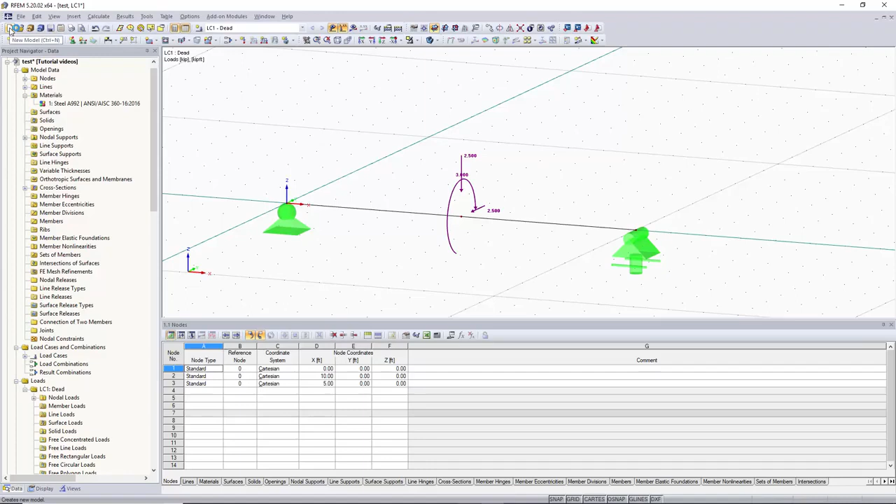To start off, we will create a new model by going up to the new model button. We can call this model video 6. Everything in here looks okay, so we'll click OK.

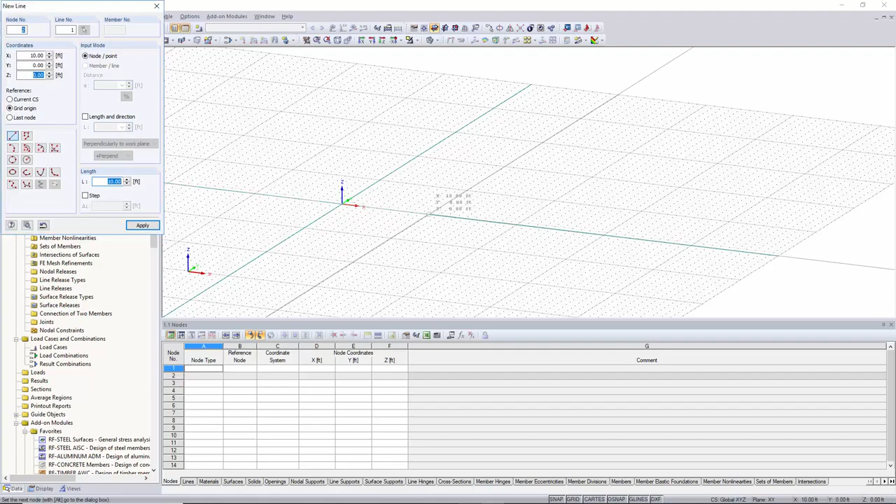As you can see, we have a blank grid where we can create our simple span beam. To do this we'll just go to new line, and we'll make it a simple beam from the origin 10 feet away along the x-axis. Now that we have our simple line, we'll add some line supports to this.

Our first end support will be a fully fixed support, and for our second end support we will create a new one, restrained in rotation about the x-axis, and allowed to move in the x direction. We'll click OK, and then graphically assign it to our beam.

Now that we have our beam, we would like to apply nodal loads to it. To do this, we can go up to this button called New Nodal Load.

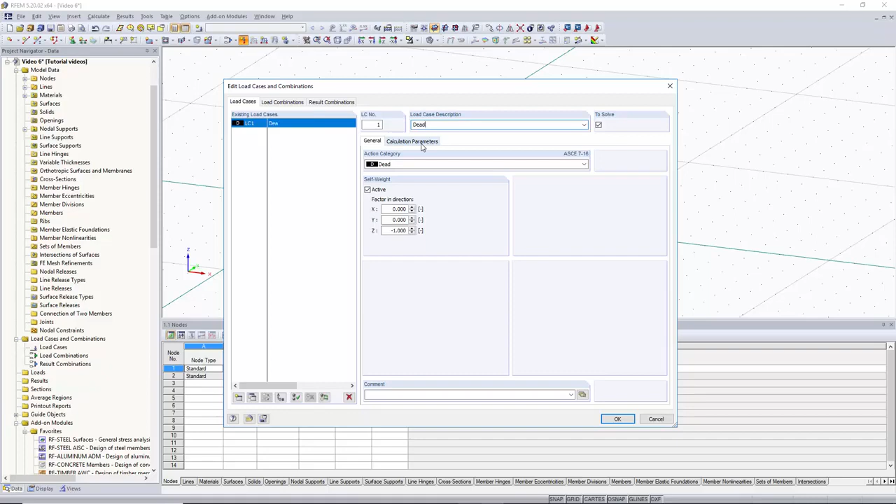Since we don't have a load case created yet, clicking on a new load will ask us to create one, and this pop-up window will come up. For our load case, we'll keep the action category as dead, and name this one dead load. The self-weight is activated, and that's okay. We'll click OK. Now our new nodal load box pops up.

As you can see, you can pick which way you want your point force to go, either the X, Y, or Z direction for your point force. On the right side, you can create a moment and pick which axis you want this moment to rotate about. For now, we'll have a -3 kip force in the Z direction.

We can also apply a rotational moment about the y-axis, and we'll make this one 3 kip feet. In the bottom right hand corner of this window is a graphic area that shows you the loads that you are about to apply to whatever node you're going to graphically select.

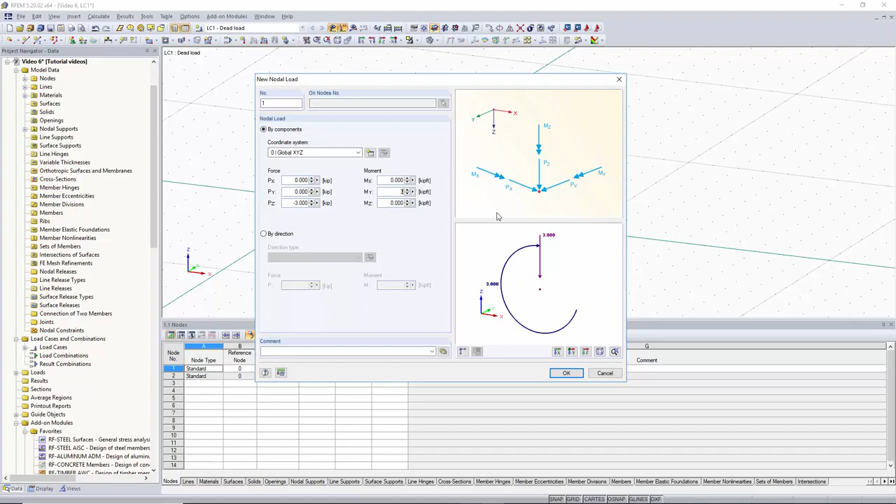Once you hit OK in this window, you will see that your cursor has an icon next to it. This means you can apply these loads to any node you'd like. For now, we'll click on one of our end nodes, and now you can see graphically the loading that's applied. We can right click anywhere in the graphic area, and this will cancel out our selection.

Now you can see there are no nodes along the span of our beam. If you want to apply a load somewhere along the span of the beam, you're going to have to add a node. To do this, we can go up here to the button called New Node, and you can add a node using coordinates, or you can also do it graphically.

Right now we'll do it graphically, and you can see that when selecting, your cursor will snap to the exact midpoint of the beam, which is 5 feet. We'll left click, then right click anywhere in the window, and now you can see that we have a node in the middle of our span.

With this node here, we can go up to our new nodal load button. We already have our load set, but we can also change any of the loads if we'd like, or add a load, or decrease or increase the load. We'll click OK.

Now we can click on the node that's in the span of our beam and apply the loads that we want. We'll right click anywhere in the graphical area to cancel out the tool.

Now I'd like to show you how to add nodes to multiple points on the beam instead of just the midpoint. We'll delete our loads, and we can also, by highlighting the node from left to right, select it without selecting the beam and hit delete.

To add multiple nodes to the beam easily, we can go to the line, right click, and click on divide line, and we can do this graphically. You can see this pop-up window comes up where you can pick the spacing and the difference between the spacing.

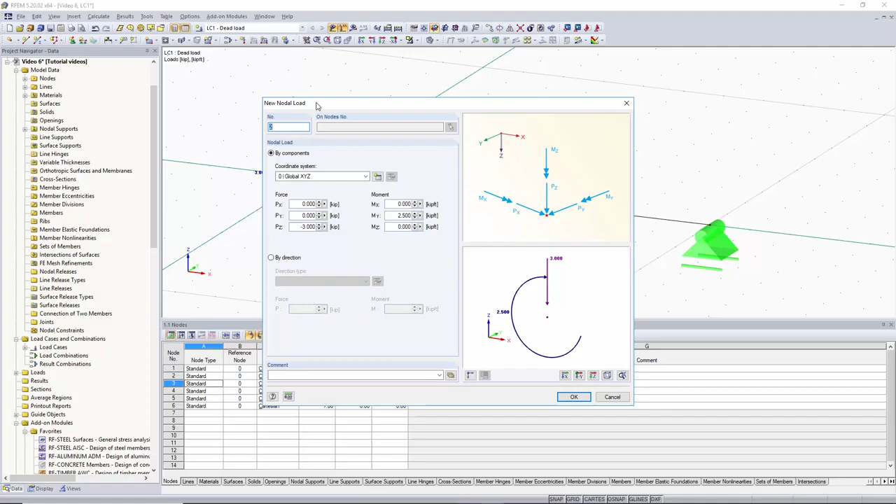We can then go to our new nodal load button and click OK, and then we can click on our nodes and add our nodal loads to them very easily. As you can see, our member was divided up into separate members.

We can easily get rid of these loads by clicking Ctrl Z and get rid of our nodes. And now our line is back to just being one single line with no divisions.

You can also right click on the line and divide the line by n intermediate nodes. So now you can pick how many nodes you would like to divide the line by. We'll keep it as 1, and click OK. And now you can see that it equally divides the line up with one node in the middle.

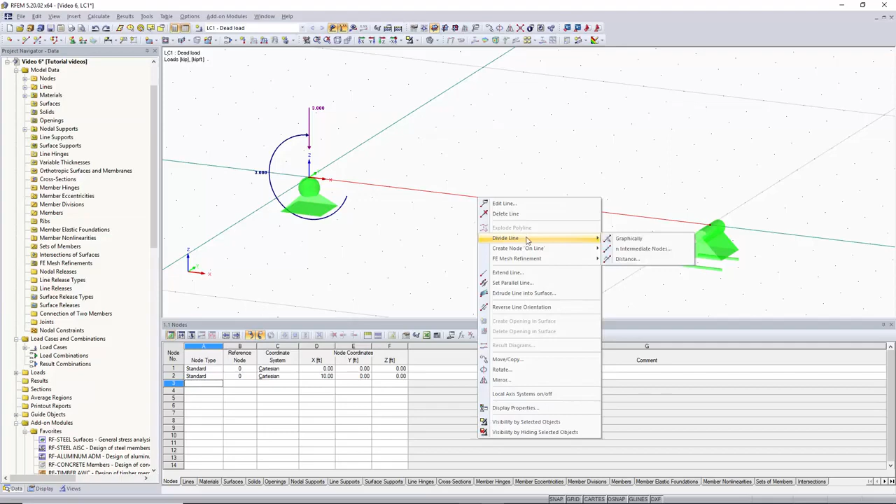Now if we would like to divide the line by the first quarter of the line, we can right click on the line, select divide line, and go to distance. The first thing we would like to choose is type of division. We're going to divide the line by new intermediate nodes.

You can also place a node without dividing a line if you'd like. We're going to do this using the true member length of 10 feet. You can see how this works up in this graphic area.

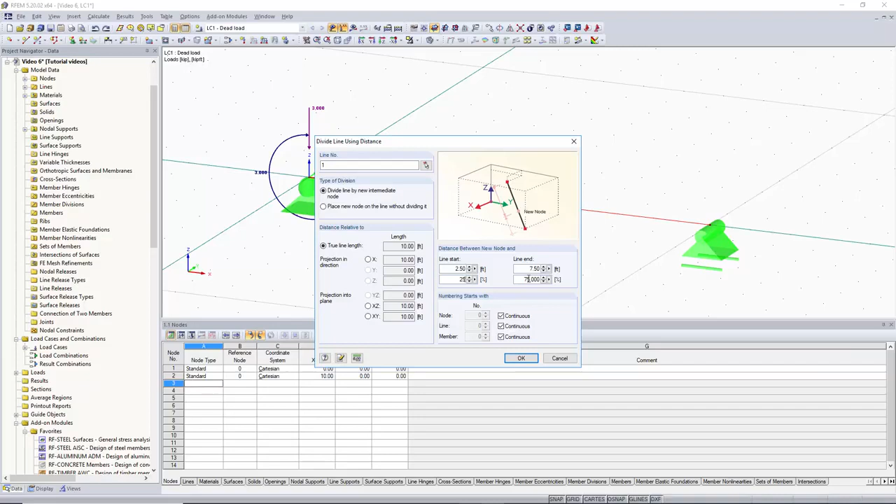And then we want the node to be placed 25% of the member length away from the start of the line, which is 75% of the member length away from the end of the line. And you can see that automatically adjusts over here. So we'll click OK, and now we have a node that's 2.5 feet away from the beginning of the line.

And we can apply our nodal loads by clicking New Nodal Load, clicking OK, and clicking on the node. Now we would like to run our results.

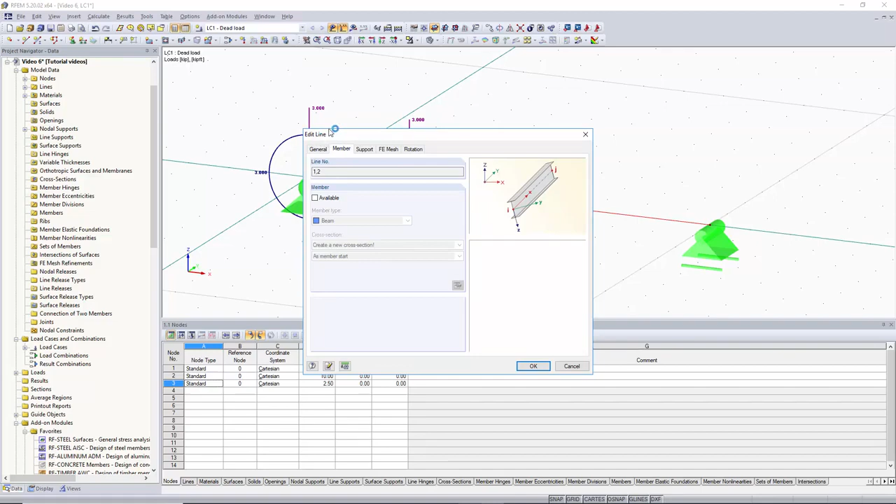Right now there's no cross-section or material set to our line, so we're going to select both of our line segments, double click on them, and then the edit line box will come up. Up here in the member tab, we want to click member available. We can then go to our cross-section library and select which cross-section we would like to apply.

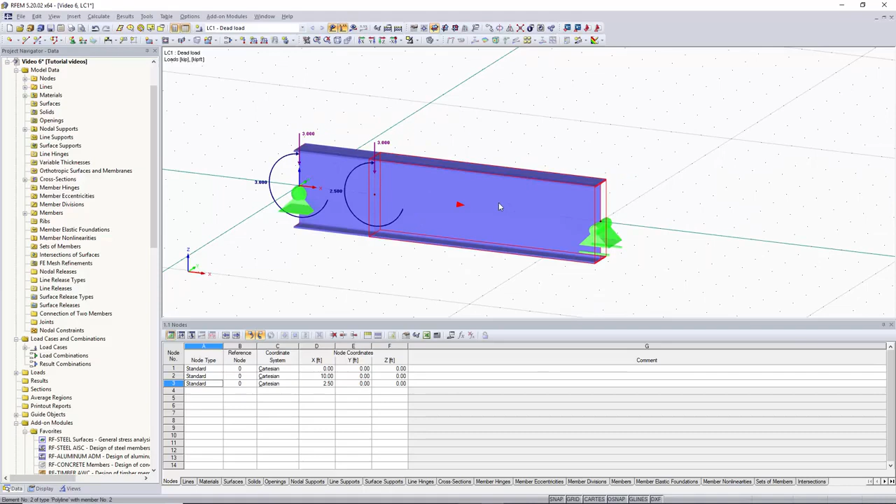We'll just apply a W30 by 90, click OK. And as you can see, our material is set to steel A992. We'll click OK, click OK again, and now we have our rendered cross-section and material along with our loads.

We'll run the results, and as you can see, turning this into wireframe view, we get our deformation along with our member diagrams for our moments and our shear.